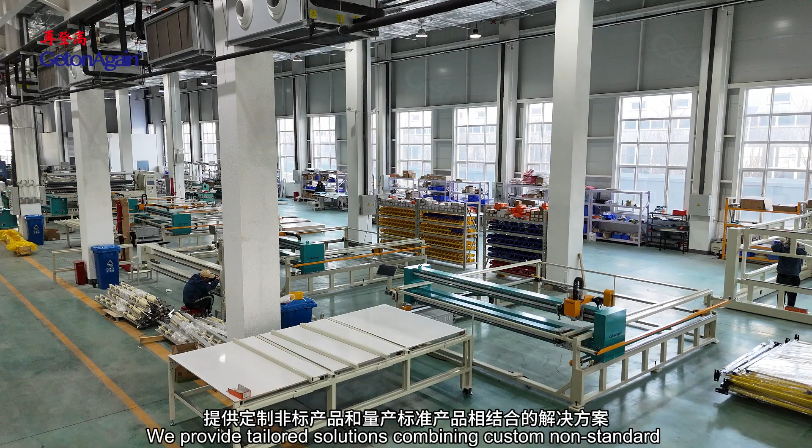We provide tailored solutions combining custom non-standard products with mass-produced standard products, including mechatronic machines, automated production lines, and intelligent factory solutions. Pattern room equipment includes the magnetic inkjet plotter: 2-cartridge model with maximum printing speed of 110 square meters per hour, and 4-cartridge model with maximum printing speed of 200 square meters per hour.

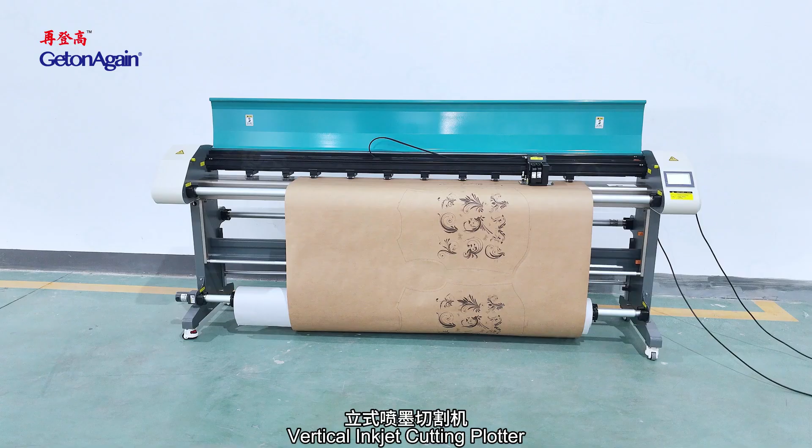Vertical inkjet cutting plotter: one machine, multiple functions, pattern drawing with cutting, or standalone drawing. High-quality rotary cutting knife can cut minimum 80 grams per square meter paper for sample design, saving costs.

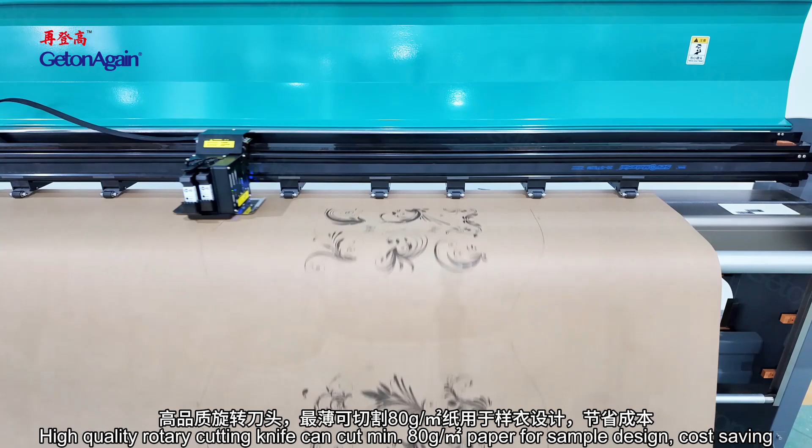Flatbed inkjet cutting plotter, full speed drawing printing and cutting function, suitable for personalization, configured with long knife or short knife, and optional fixed knife sleeve or elastic knife sleeve, suitable for cutting various materials.

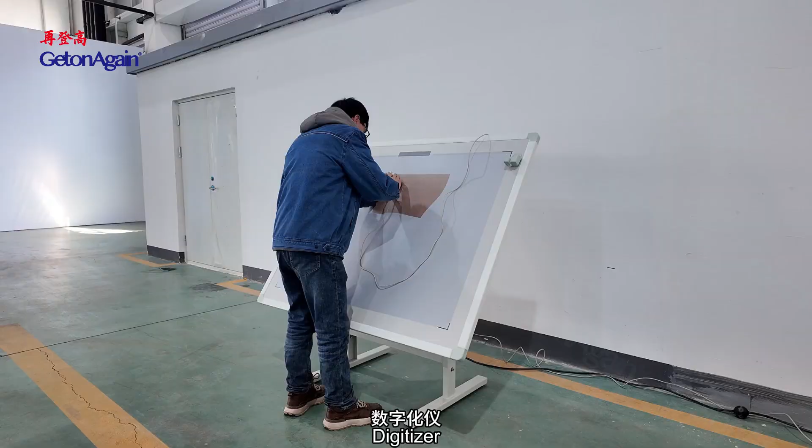Digitizer: easily reading paper patterns, convenient positioning, simple operation, accurately reading patterns, enabling speed up of the design. It is a powerful tool for traditional manual drawing digitization.

Digitizer can be used in various fields, such as clothing industry, fashion design, surveying and mapping, mining, stamping, and environmental protection, etc. Flatbed scanning digitizer.

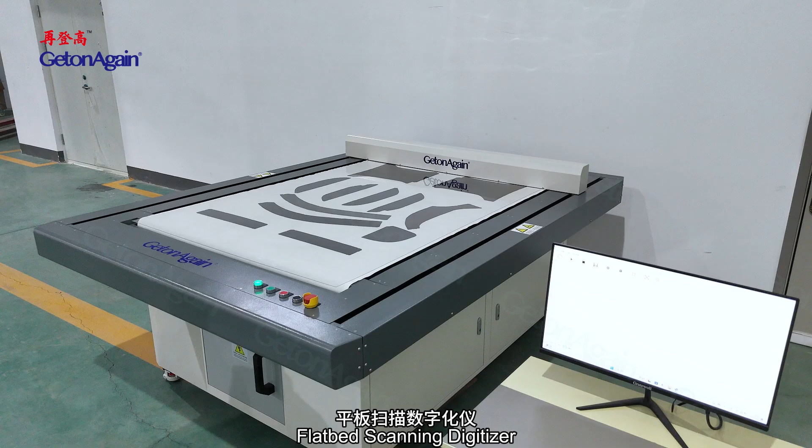One button to start after placing scanning pieces. Can vacuum absorb, auto scan, and auto transmit. According to different models, supports ultra-long width scanning. Scanning speed up to 7,200 mm per minute. Scanning resolution 150 to 300 dpi. High definition panoramic 1:1 image ensures effective identification of various contours, notches, and inner holes.

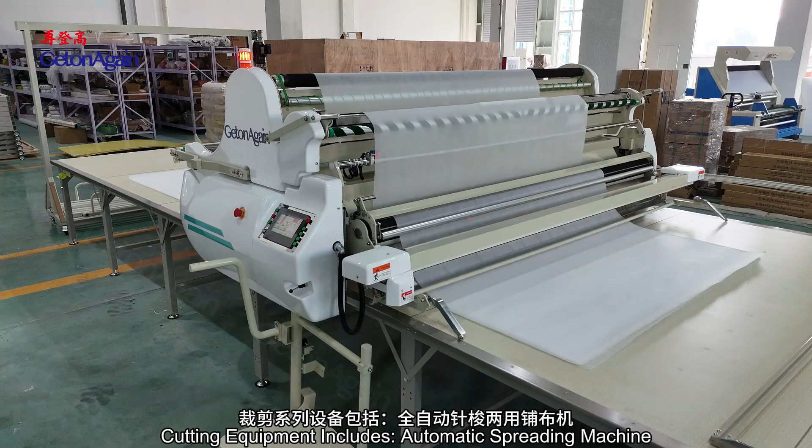Cutting equipment includes automatic spreading machine. Easily set the spreading method, length, speed, quantity, and sections, with intuitive and simple operation. Dual use for both knit and woven fabrics, suitable for t-shirts, children's clothing, loungewear, and toy textiles.

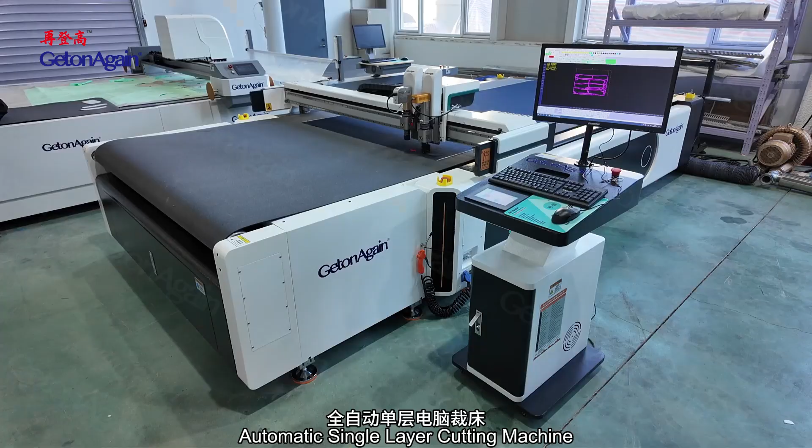Automatic single layer cutting machine. No need to create specialized cutting molds. Cutting can be performed precisely by directly importing CAD design drawings into the equipment. Optimizes cutting paths, integrates repeated cutting lines, allows for pre-simulation of the cutting process, and supports continuous cutting for extra long materials.

Stripe and plaid matching cutting machine, equipped with a few HD industrial cameras, according to the captured size to perform intelligent combination, ensuring high accuracy fabric image capturing.

Stripe and plaid matching auto cutter, equipped with double knives and pen draw punching working mode, specially designed for various stripe and plaid fabric cutting in single ply.

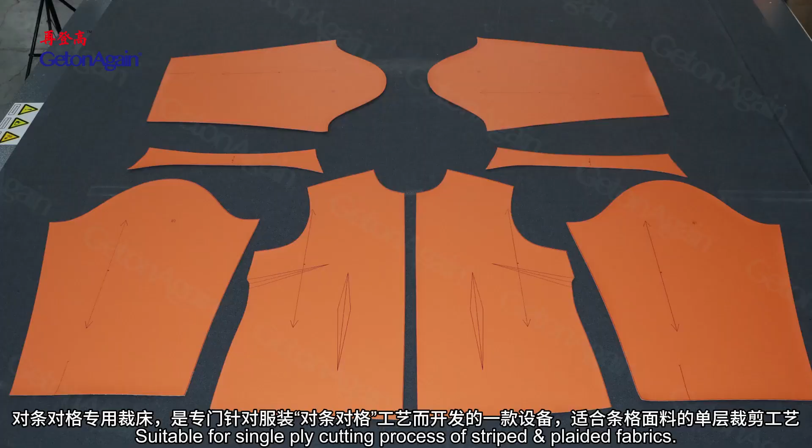High-end clothing customization: the effect of the alignment matching stripe and plaid process has become an important measurement of the quality of this type of clothing. The stripe and plaid auto cutter is equipment specially developed for this process to meet matching stripe and plaid clothing needs, suitable for single ply cutting. Process of striped & plaided fabrics.

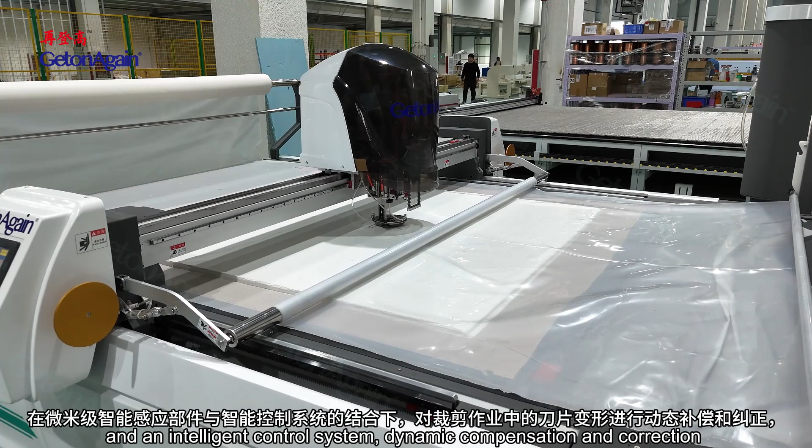Automatic multi-layer cutting machine: through the combination of micron-level intelligent sensing components and an intelligent control system, dynamic compensation and correction of cutter deformation during cutting operations are achieved, significantly reducing errors between the top and bottom layers of fabric during cutting, enabling truly high-precision intelligent cutting.

Embroidery equipment includes the Cloud Smart Teaching Embroidery Machine, suitable for integrated theoretical and practical teaching of computer embroidery in fields such as fashion and apparel design, clothing design, and engineering.

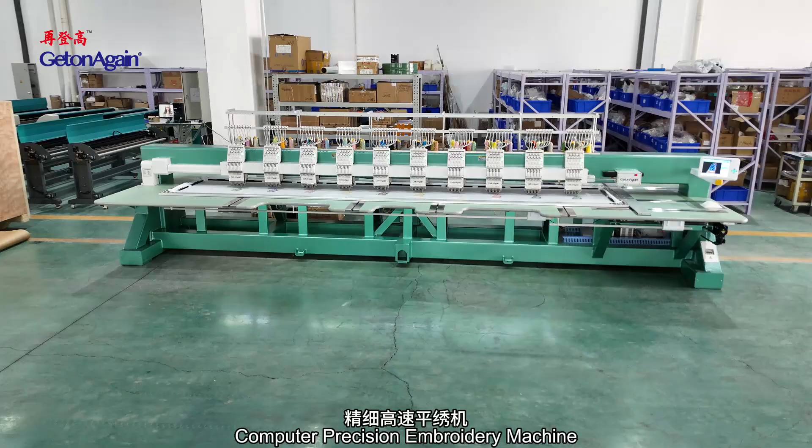Computer Precision Embroidery Machine features a high-speed sewing head with extremely low failure rates, long service life, low noise, and stable, reliable quality, suitable for embroidering small letters, premium garments, high-end home textiles, footwear, hats, automotive products with embroidery, etc.

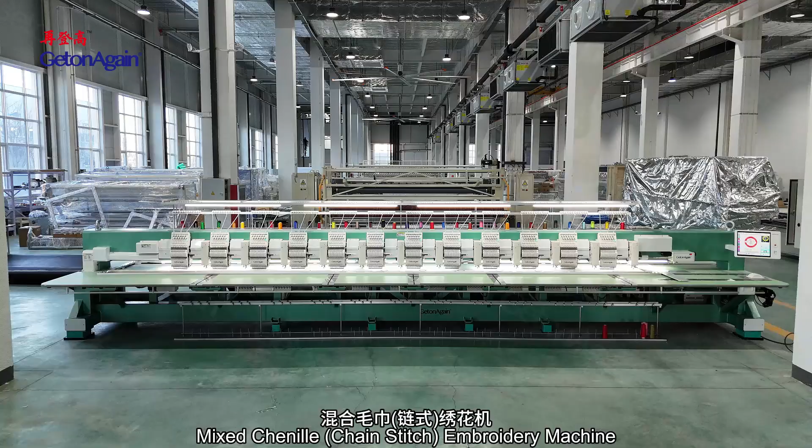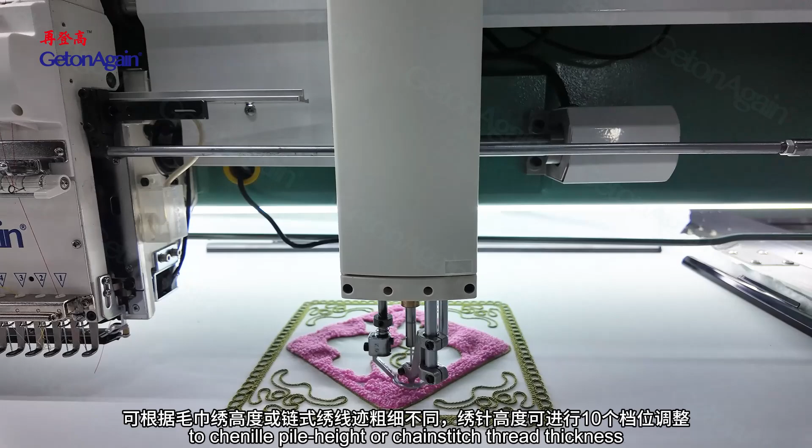Mixed Chenille Chain Stitch Embroidery Machine. Mixed embroidery feature, according to color sequence settings, switchable between chenille embroidery and flat embroidery, simplified operation. Chenille needle height can be adjusted for 10 levels according to chenille pile height or chain stitch thread thickness.

Multifunctional embroidery on garments, shoes, caps, home textile, toys, bags and luggage, art craft, etc. Multi-head tubular embroidery machine, multi-head series, suitable for embroidering on flat items, caps, garments, shoes, belts, bags, etc.

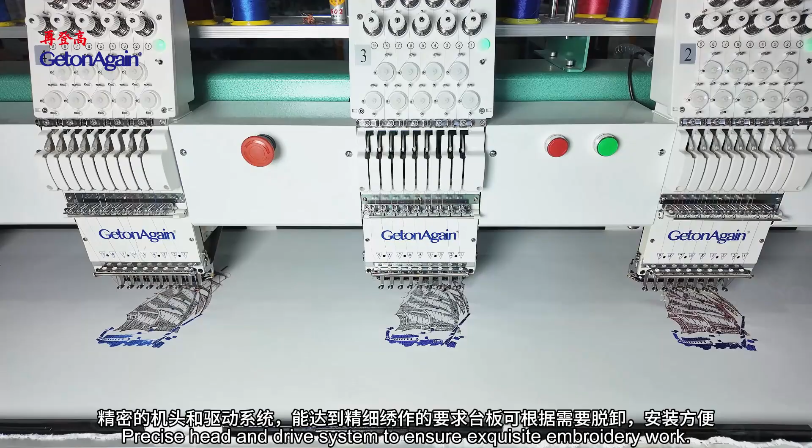Auto thread feeders, auto color change, auto thread break detection, 270-degree wide angle cap system, red light locating, LED lighting, precise head and drive system to ensure exquisite embroidery work. Drop tables, easy to lift up and down. Multiple heads greatly improve work efficiency, suitable for embroidery shops and factories of a certain scale.

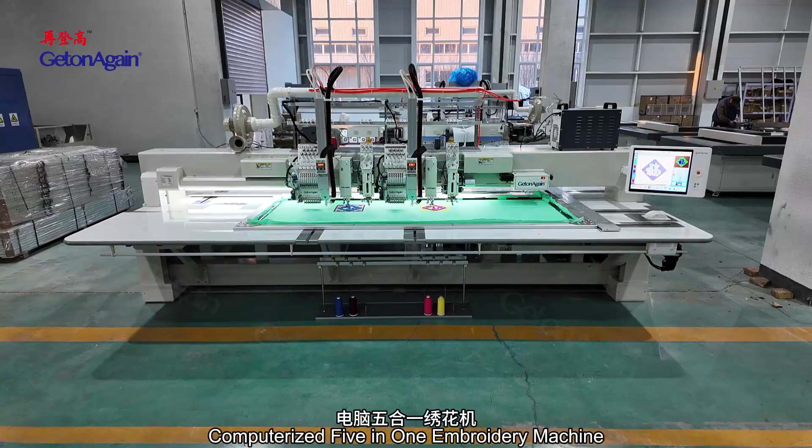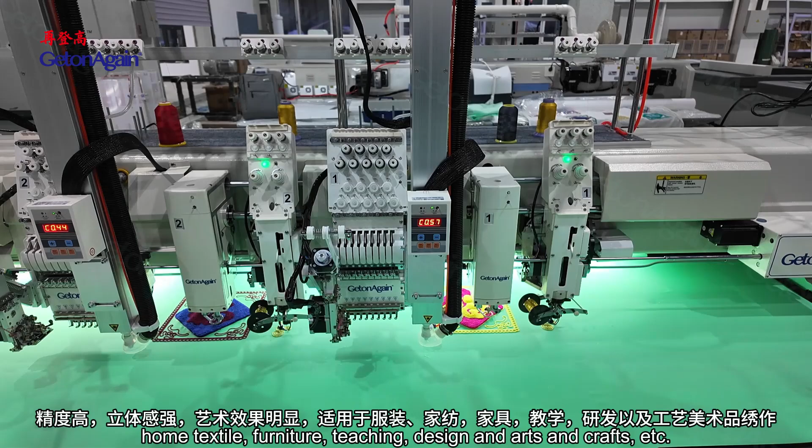Computerized 5-in-1 embroidery machine, integrating five functions in one machine: flat embroidery, quilting, tape cording embroidery, chenille, and chain stitch embroidery, plus double sequin device and laser cutting function. High precision with strong stereo sense and ideal artistic effect, suitable for embroidery of apparel, home textile, furniture, teaching, design, and arts and crafts.

Tufting series equipment includes computerized tufting machines with a rotary tufting head at any angle, avoiding positive-negative stitching difference, for higher efficiency and better tufting results. Suitable for various rugs, carpets, hanging carpets, tapestry, and other flooring decorative and home furnishing products.

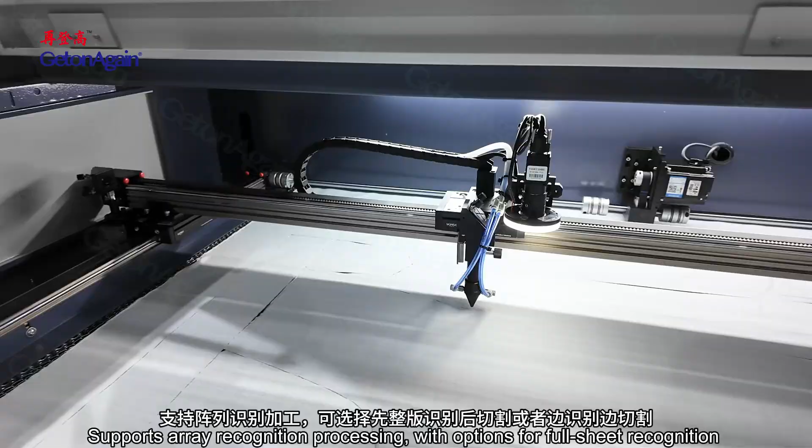Laser equipment includes small format camera positioning laser engraver cutting machines, supporting array recognition processing with options for full sheet recognition followed by cutting, or simultaneous recognition and cutting. Features multi-template mixed cutting, allowing recognition and positioning of different patterns to be completed in a single operation.

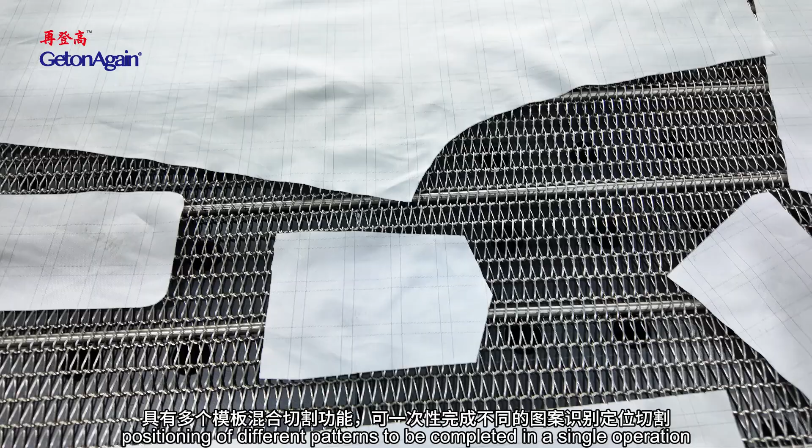Pre-sewing auxiliary equipment includes automatic edge alignment and relaxing machines with air blowing, rolling fabric mounted and folded into a flat fold state to achieve tension-free fabric placement. A wave-type air blowing device relaxes the fabric during the loosening process.

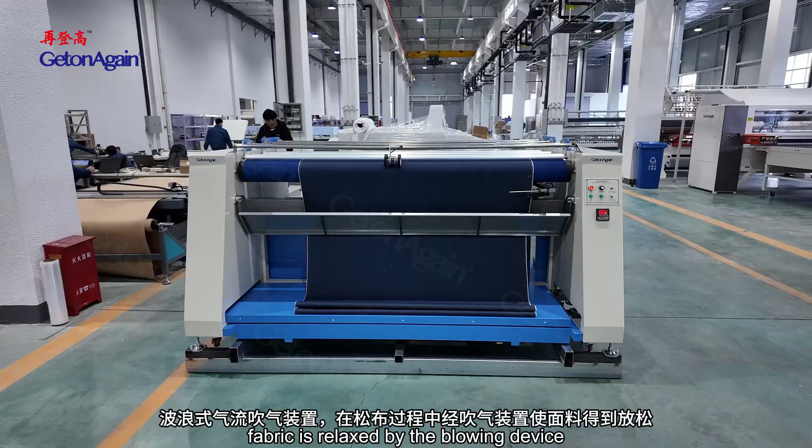Automatic marking machine with one-click start and intelligent grabbing—one person can operate 4 to 5 machines at the same time, reducing labor costs. Features automatic number adjustment, automatic counting, wrinkleless flipping, continuous numbering, and accurate, clear positioning. Used for cutting pieces for jeans, shirts, workwear, and down jackets.

Fully automatic winding machines. Sewing equipment includes an automatic mattress protector skirting sewing machine with interlock and overlock functions, suitable for processing fitted sheets—all-in-one to finish binding and stitching of elastic rope cord and bed skirt, plus overlocking of the bed skirt to the mattress protector topper layer.

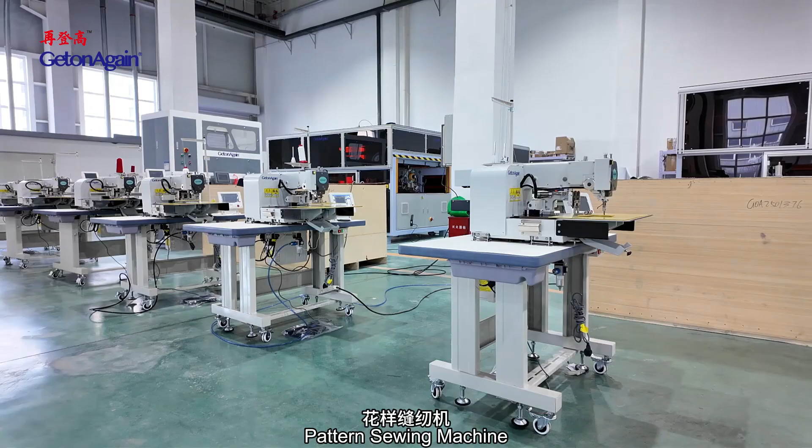Pattern sewing machine. This machine can easily sew 1200 thick thread with a thickness of 12mm, featuring a 2-times large rotary hook, automatic thread trimming, and a maximum sewing speed of up to 2500 rpm.

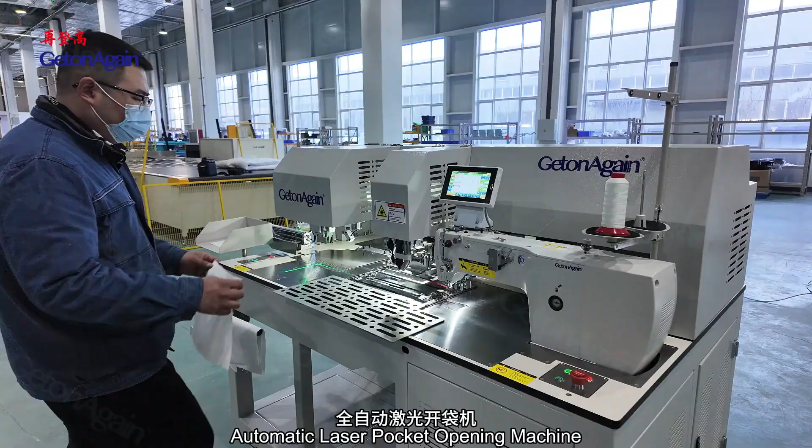Automatic laser pocket opening machine with automatic ironing, free pocket folding, automatic material feeding, laser pocket opening, automatic sewing, automatic thread trimming, and automatic material collection. Used for front and back pockets of men's and women's clothing, suits, inner and outer pockets of jackets, dress pants, hoodies, sun protection clothing, school uniforms, sportswear, cotton padded jackets, down jackets, workwear, uniforms, trench coats, and cashmere coats.

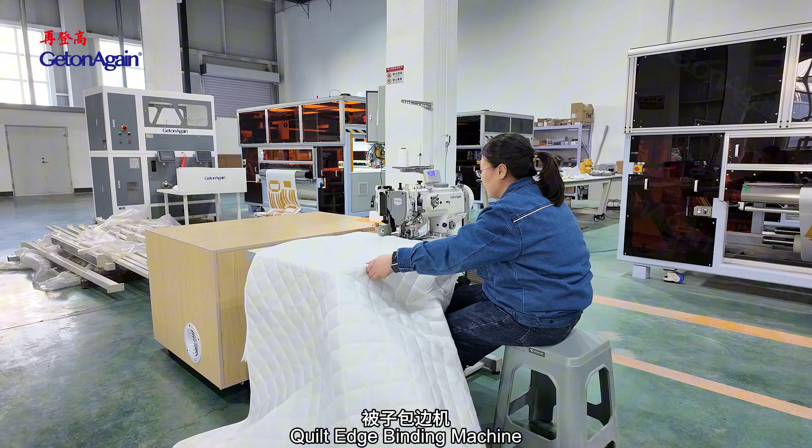Quilt edge binding machine features single needle compound feed, achieving cutting, binding, and sewing in one seamless operation. An enlarged right side waste discharge port with pneumatic waste discharge assistance ensures smoother disposal of waste generated during edge cutting. A special synchronized feeding structure, including alternating presser foot, needle, feed dog, and binding attachment, ensures no wrinkles or misalignment during straight line or corner sewing for a flawless binding effect.

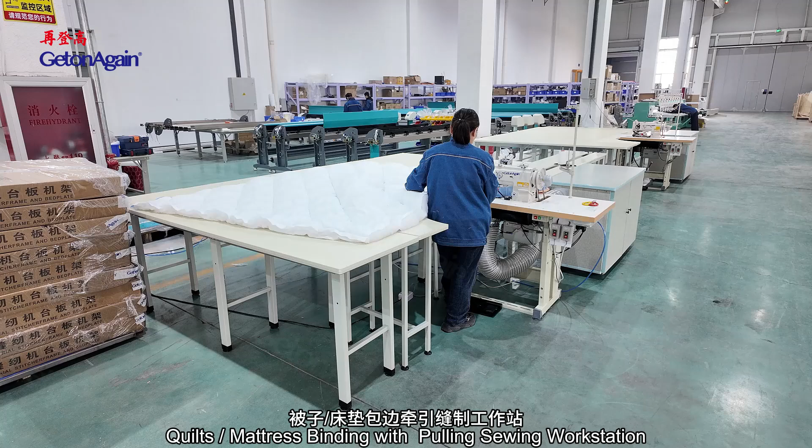Designed for edge binding processes of quilts such as cotton quilts, summer quilts, spring and autumn quilts, and other bedding items. Quilt and mattress binding with pulling sewing workstation.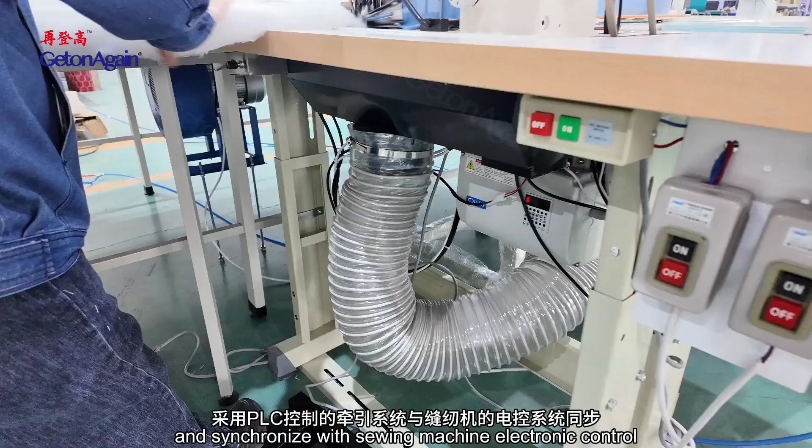Equipment factory standard provides an air floating table and automatic pulling device, making sewing worker operation easier and smoother. Equipped with a PLC control pulling device synchronized with sewing machine electronic control, these two machines work at the same speed and synchronize direction.

Optional automatic storage and vacuuming device improves efficiency, reduces dust emissions, and provides the sewing operator a clean and tidy working environment. Binding results are rich with a strong, solid feel—corners are smooth and nice, evenly stitched lengths, no hairy edge, no edge folding, and no corner raising effects.

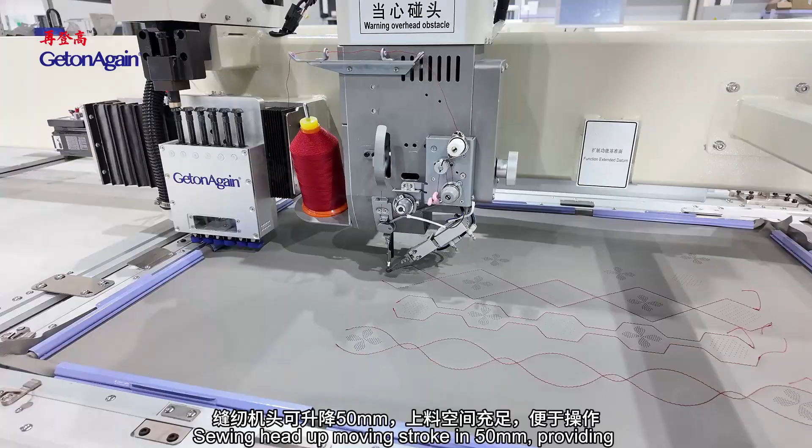Fully automatic perforation and sewing integrated machine. The punching machine head is specifically designed and developed for leather materials, equipped with various round punching tool specifications. The sewing head's up-moving stroke is 50mm, providing sufficient space for material loading and easy operation. Suitable for perforation and sewing processes of various types and thicknesses of genuine leather and microfiber leather used in car seats, automotive interiors, aircraft seats, luggage, furniture, and more.

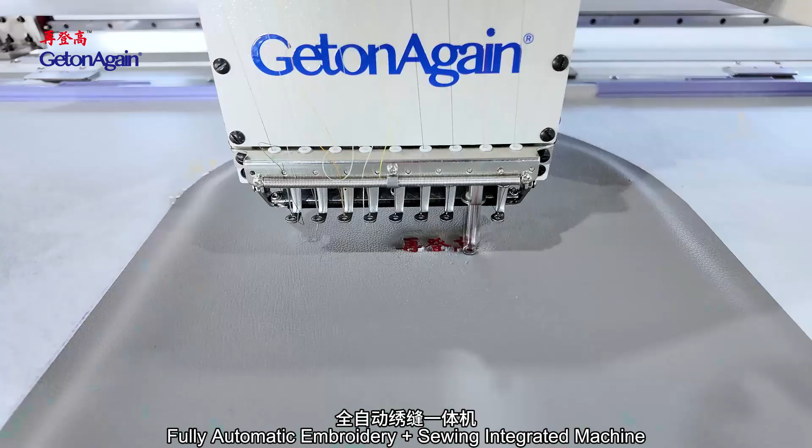Fully automatic embroidery and sewing integrated machine with a 9-color embroidery machine head to meet the embroidery needs of different industries. The embroidery thread clamping mechanism incorporates a novel upper thread clamping assembly, effectively reducing thread breakage and slippage occurrences during operation.

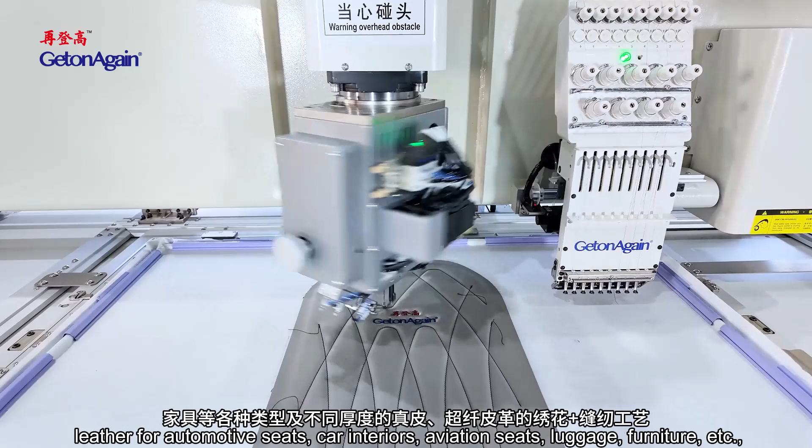Specially designed sewing machine head for leather materials produces beautiful stitching. Presser foot height is motor controlled and highly adjustable. The sewing machine head has an up-down moving stroke of 50mm, providing ample space for material loading and ease of operation. Suitable for various types and thicknesses of genuine leather and microfiber leather for automotive seats, car interiors, aviation seats, luggage, furniture, and more, combining embroidery and sewing processes.

Multi-hole bar tacking machine: press arm and sewing frame work synchronously to ensure high precision bar tacking. Suitable for chair head, cushion and pillow, all those with fillings, and bar tacking requirement for reinforcing sewing work.

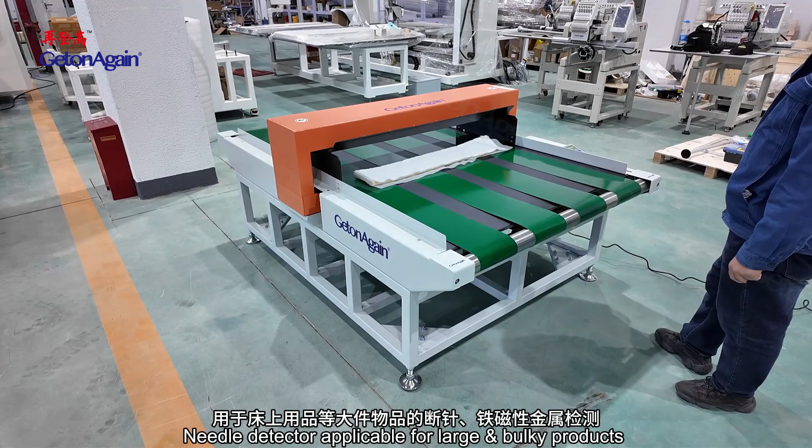Industrial sewing machines include various overlock and lock stitch machines. Post-finishing equipment includes needle detector, applicable for large bulky products with ferromagnetic metal detection, for example bedding, etc. Working width can be adjusted between 1,200 to 4,000 mm according to customer setting.

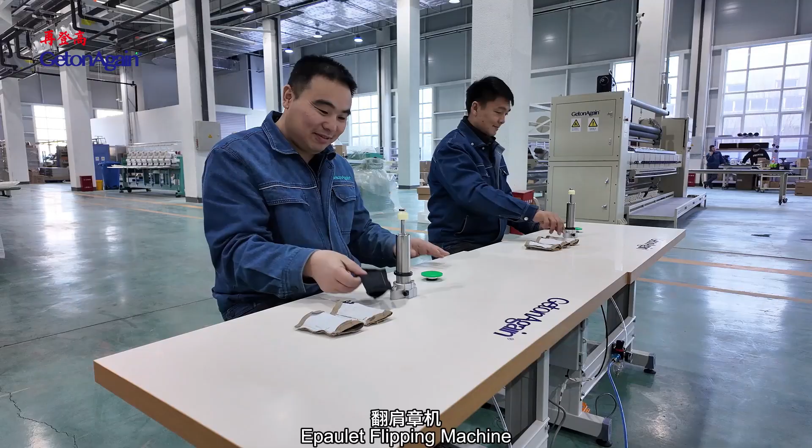Epaulet flipping machine replaces manual operation with high efficiency, safety and reliability, suitable for the flipping and turning process of epaulets or straps of various sizes and other products.

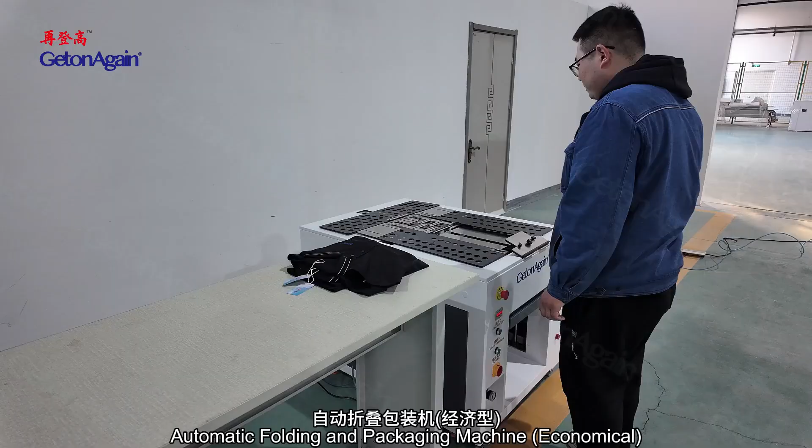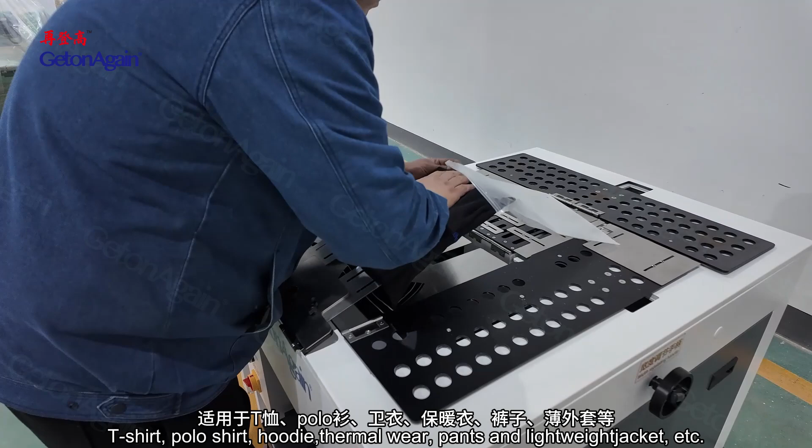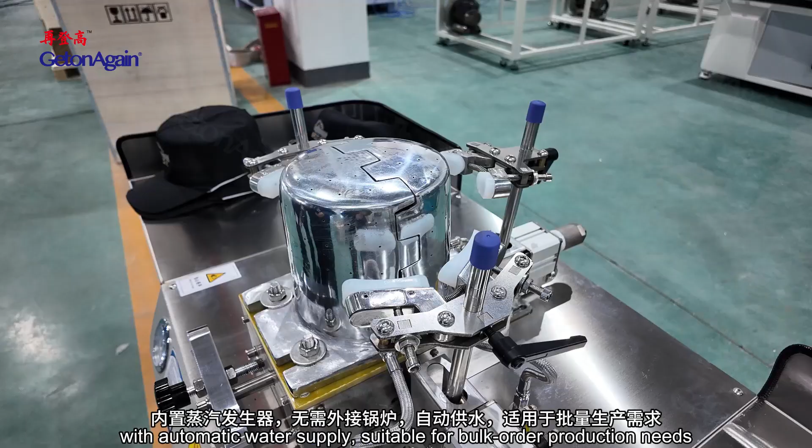Using a robotic arm, the machine can automatically grip the cap. Simply place the cap on the mold to complete the pressing process.

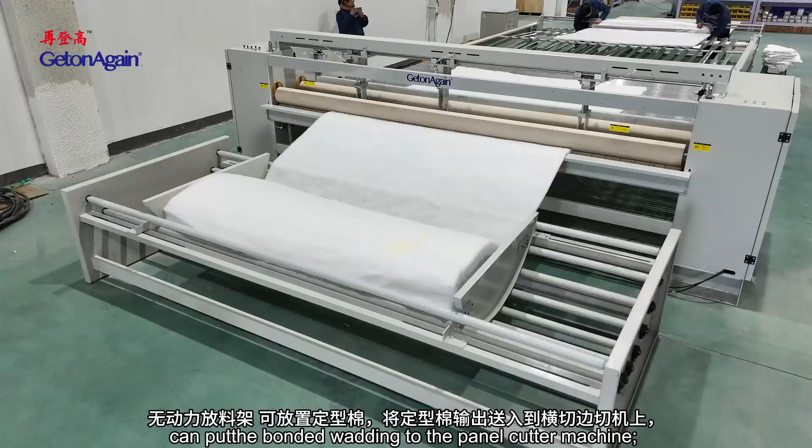Electric flying knife automatic cross cutting. Two sets of longitudinal hard cutting blades can be increased or decreased according to product track requirements. Automatically feeding the wadding fibers into the comforter envelope case after cutting off. Length set is controlled by computer and could be set to any value according to requirement.

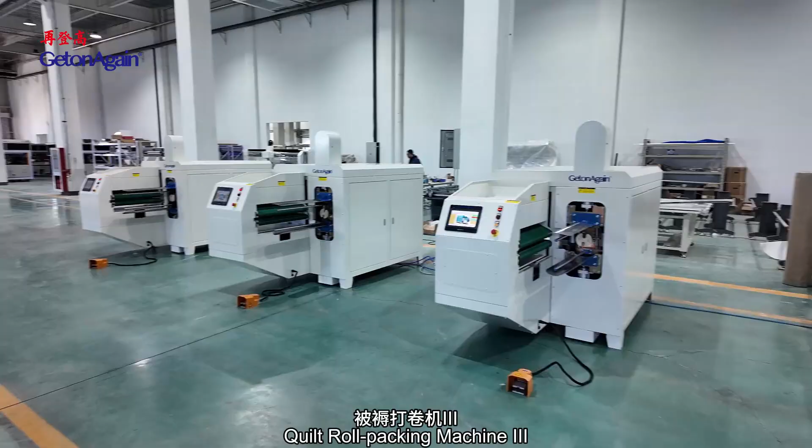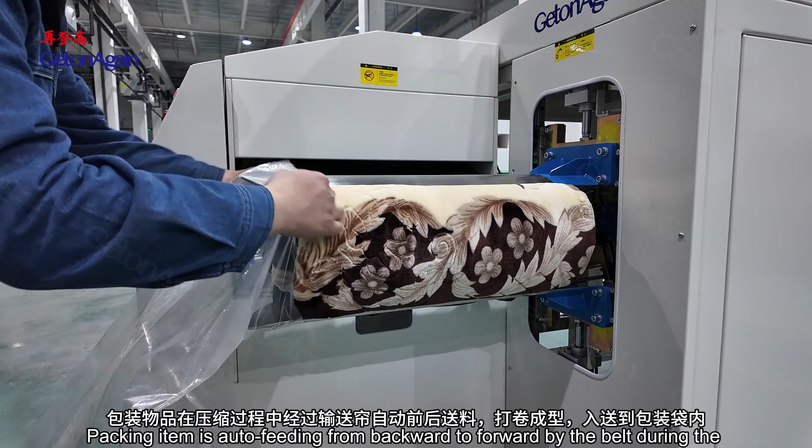Quilt roll packing machine, suitable for rolling and packing of fluffy items such as quilts, pillows, cushions, etc., to reduce the volume and storage, as well as lower transportation cost. The packing item is auto-fed from backward to forward by the belt during the compressing process and rolled to pack into the bag.

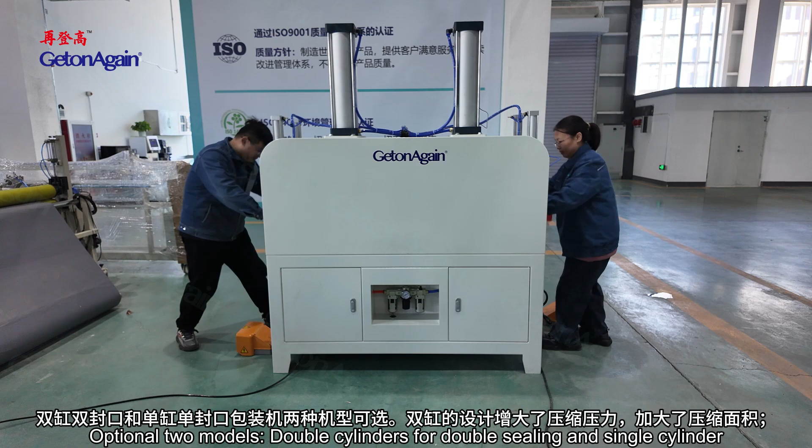Double cylinders, double operation, optional models. Double cylinders for double sealing and single cylinder for single sealing. The double cylinder design increases the compression pressure and area. Double seal design: two workers operate two products at both sides of the machine, greatly improving work efficiency, suitable for compressed packing of pillows, cushions, bedding, plush toys and other products.

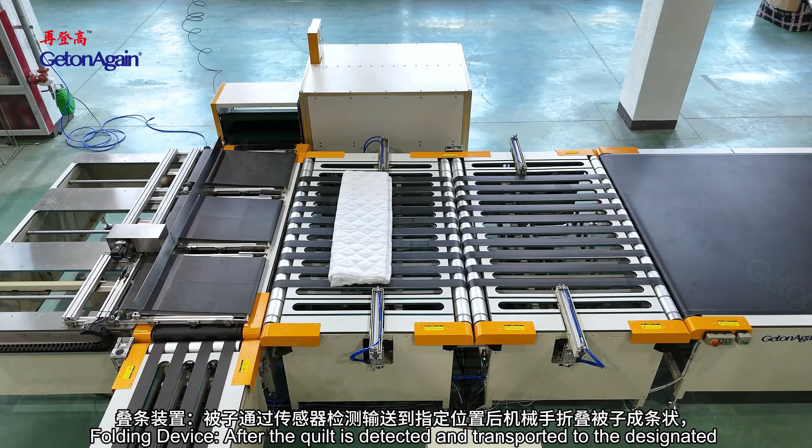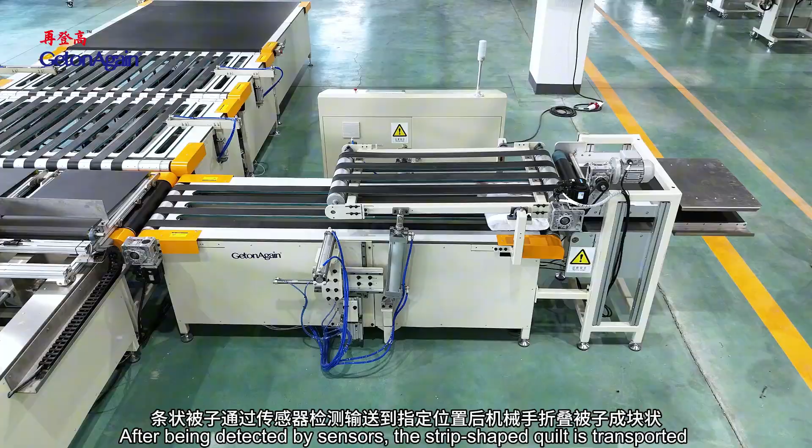Automatic folding and packaging machine: equipment mainly composed of folding device, rolling device, stacking and compress plus conveyor device. Folding device: after the quilt is detected and transported to the designated position by sensors, a robotic arm folds the quilt into a strip shape. After being detected by sensors, the strip-shaped quilt is transported to the designated position and folded into a block shape by a robotic arm. Rolling device: the strip-shaped quilt is transported to the automatic rolling device to complete the rolling process.

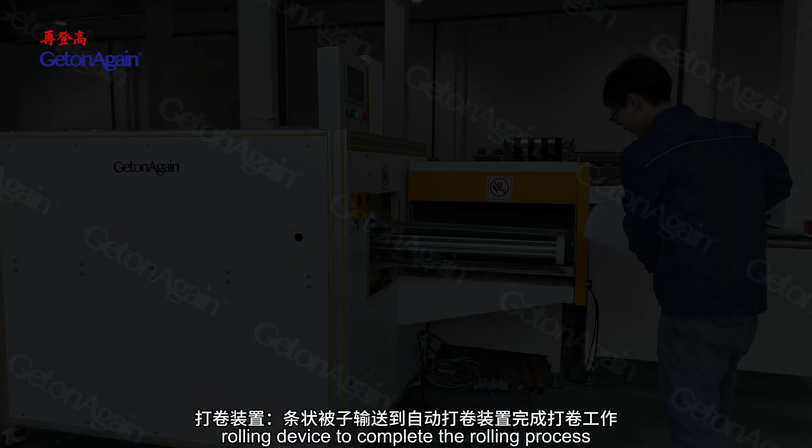Quilting equipment includes computerized multi-head rotary hook quilting machine model N, double row lock stitch multi-head quilter with large rotary hook. Max speed of 1,500 RPM, more than 2 to 3 times that of normal shuttle quilting machines, greatly improving work efficiency. 3-fold capacity rotary hook, less bobbin changing frequency, beautiful stitches, no lost stitch, no thread loose.

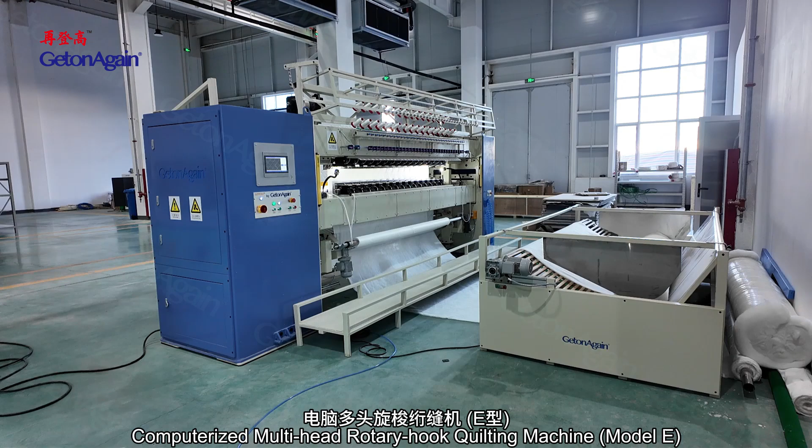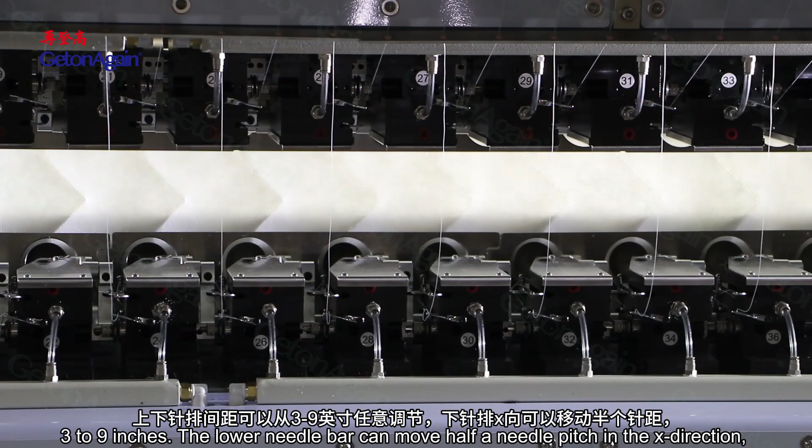Computerized multi-head rotary hook quilting machine model E: 5-time jumbo rotary hook, less bobbin changing frequency, beautiful stitches, no lost stitch, no thread loose. The interval between the upper and lower needle bars can be adjusted to any value from 3 to 9 inches. The lower needle bar can move half a needle pitch in the X direction, so that quilting needle bars of different sizes and patterns can be combined, especially for some non-standard size patterns, which can achieve a unique effect.

Computerized multi-needle shuttle quilting machine, flying shuttle, for quilting of fitted sheets, bed covers, summer quilts, and clothing products with quilting pattern.

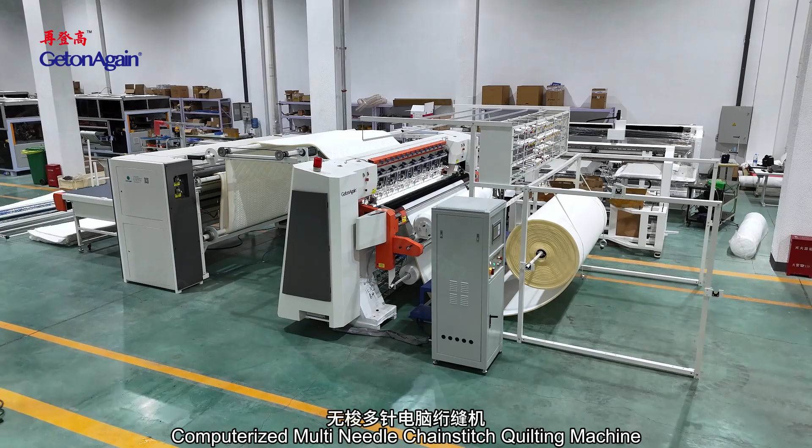Computerized multi-needle chain stitch quilting machine: servo motor-driven rollers and lead screws ensure precise quilting patterns, suitable for mattresses, mattress covers, sofas, bedding, home textiles, and home decor. Computerized single-needle quilting machine with lifting head.

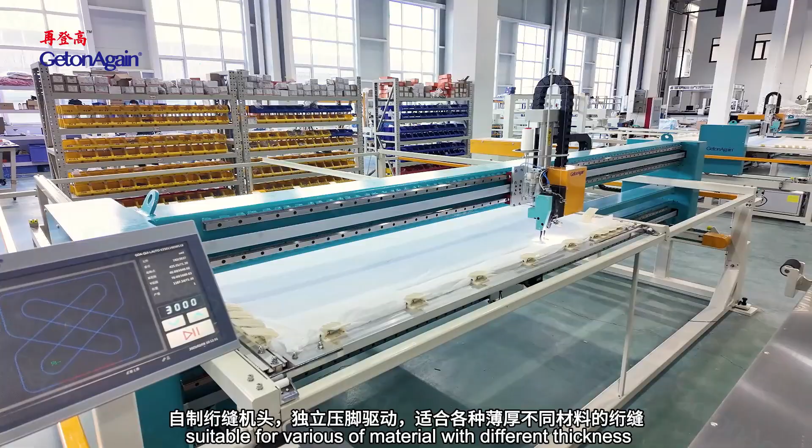The extendable quilting frame can be freely adjusted according to required size. GetonAgain quilting head features independent presser foot drive, suitable for various materials with different thickness. Full servo motor control provides powerful and accurate driving force. Automatic lifting head easily changes the frame after finishing quilting.

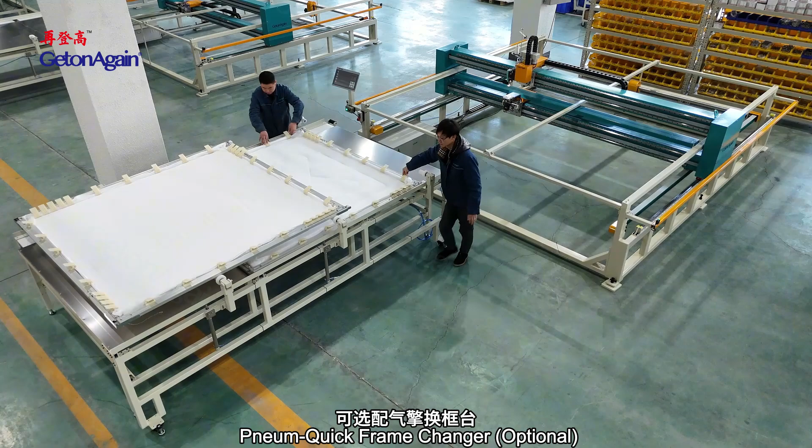Pneum-Quick frame changer optional, for quilting process of home textile products such as quilts, comforters, mattress protectors, blankets, sleeping bags, single needle art quilts, etc.

Ultrasonic equipment includes the ultrasonic slitting machine, which adopts ultrasonic cutting technology to ensure smooth cutting edges, precision edge cutting, and no deformation, without fraying, fiber pull, or edge curling after cutting. Cutting rollers and patterns can be customized to meet various needs.

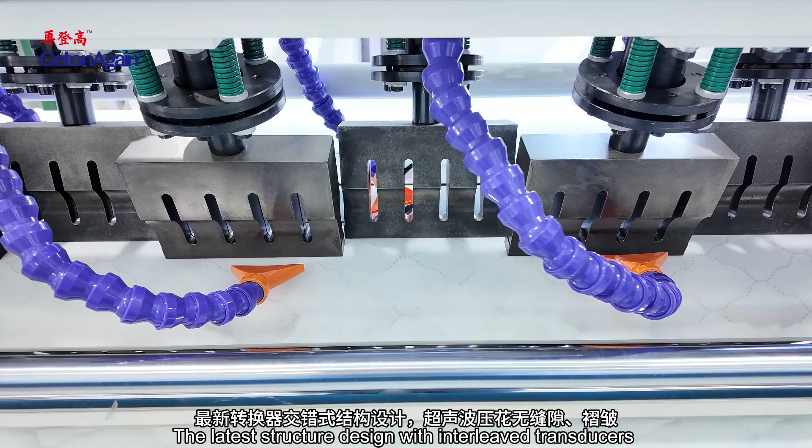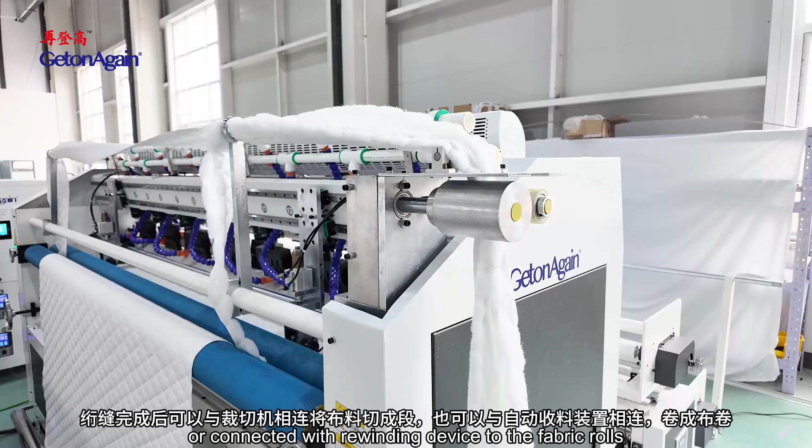The automatic ultrasonic quilting machine integrates ultrasonic sewing and ultrasonic edge sealing and cutting automation into one, completing the process in a single step. The latest structure design with interleaved transducers ensures seamless, non-wrinkled embossing. After quilting, it can be connected with a cutting machine to finish the product, or with a rewinding device for fabric rolls. The ultrasonic quilting machine bonds multi-layer polyester fabric, non-woven fabric, polyester wadding, or artificial leather, etc., embossing different patterns on it. Patterns are clear and beautiful, the fabric doesn't deform, and bonding is strong with high efficiency.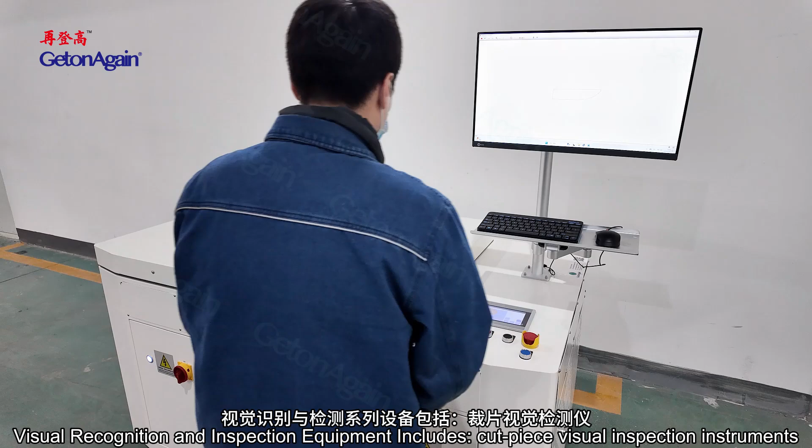Visual recognition and inspection equipment includes cut piece visual inspection instruments. After manual placement, one-click start allows for automatic scanning, automatic inspection of cut pieces, and automatic data storage. Scanning speed can reach up to 120 millimeters per second, with no need for additional lighting, ensuring reliable use in all weather conditions. Scanning resolution is 150 to 300 dpi, and the high-definition panoramic 1:1 image ensures the inner and outer contours of the cut pieces are clearly visible.

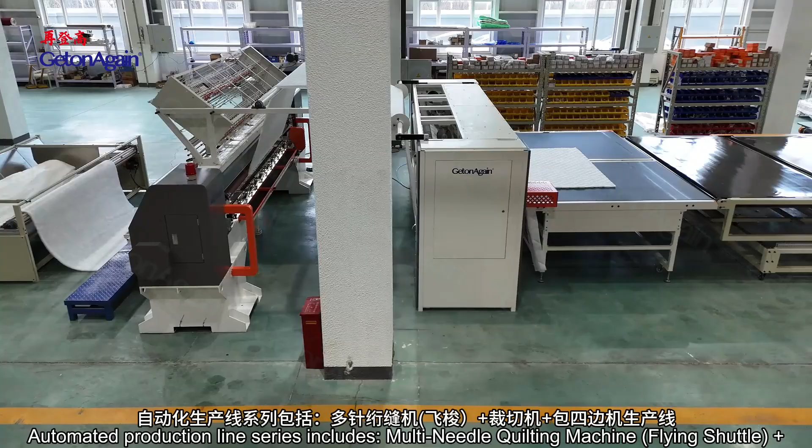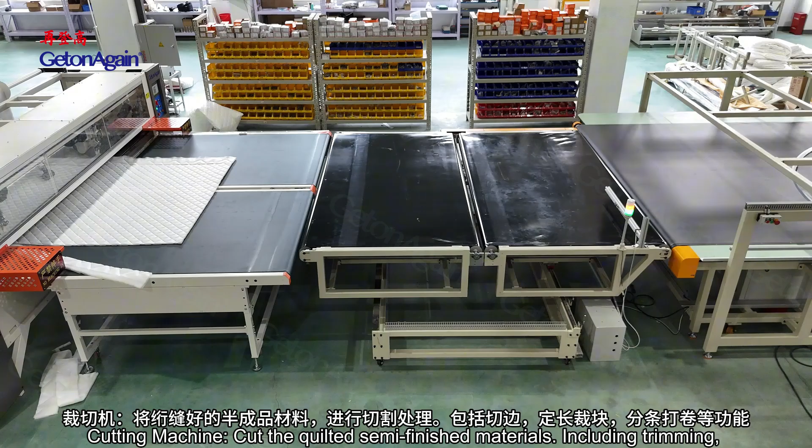The automated production line series includes the multi-needle quilting machine, flying shuttle and cutting machine, and 4-side tip binding machine production line. The multi-needle quilting machine quilts and fixes lock stitches on raw materials, mainly used to process quilt cores and cushions. The cutting machine cuts the quilted semi-finished materials, including trimming, fixed length cutting, slitting, and rolling, among other functions.

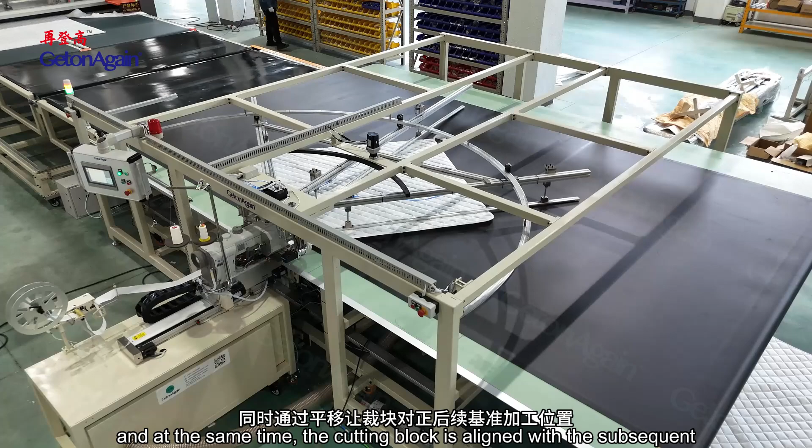Alignment platform: a material transfer alignment mechanism. The cutting block waits to enter the next sequence on this platform, and at the same time, it is aligned with the subsequent reference processing position by translation.

Automatic tip binding machine: the cutting piece is processed by the tip binding machine to make the edge of the cut piece beautiful, using a machine rounded corner tip binding process. Cutting and tip binding are integrated, with all actions completed automatically.

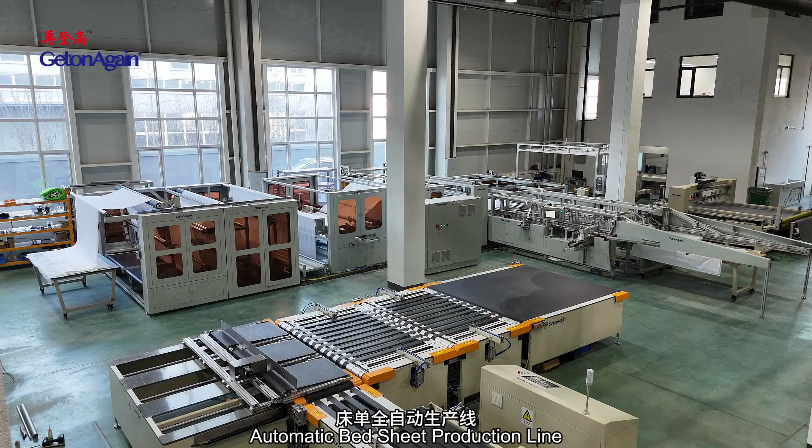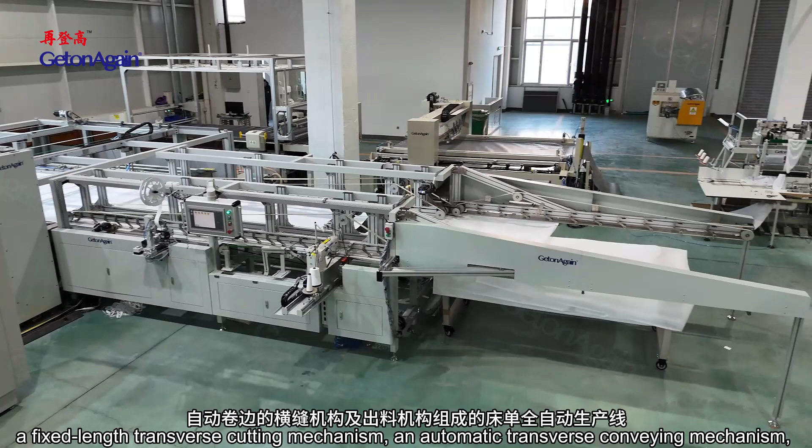Automatic bed sheet production line: a fully automated bed sheet production line composed of a feeding mechanism, an adjustable width longitudinal sewing mechanism, a fixed length transverse cutting mechanism, an automatic transverse conveying mechanism, an automatic hemming transverse seam mechanism, and a discharging mechanism.

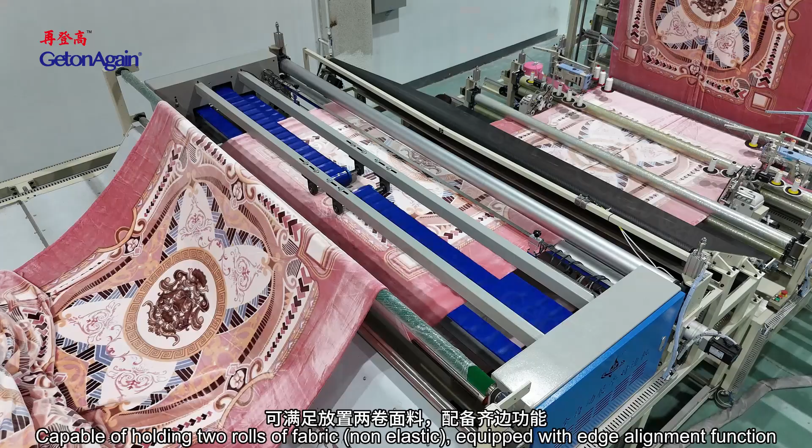The automatic blanket straight corner binding machine is capable of holding 2 rolls of non-elastic fabric, equipped with an edge alignment function, automatically pulling and cutting into panels. Pulling lengths can be set freely. This covers the 4-side tip binding sewing process for inelastic blankets.

Home textile comb cotton production line.

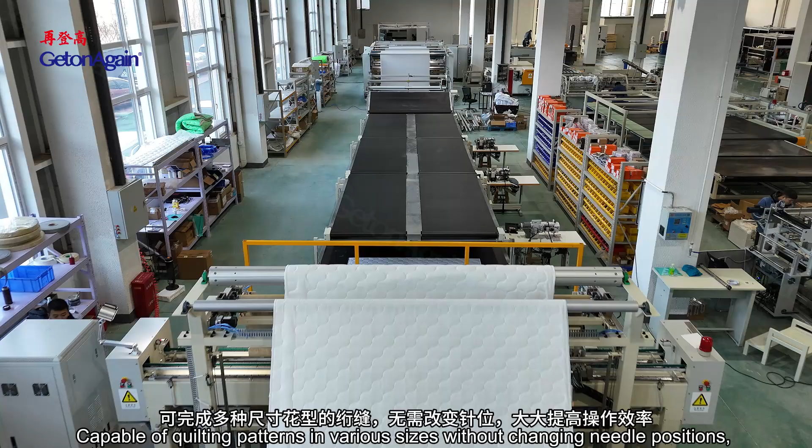The computerized multi-head rotary hook quilting machine and 4-side edge sewing machine is capable of quilting patterns in various sizes without changing needle positions, greatly enhancing operational efficiency. The double row machine, with its lower needle row able to move half the head distance in the X direction, creates combination patterns of different sizes when coordinated with the upper needles.

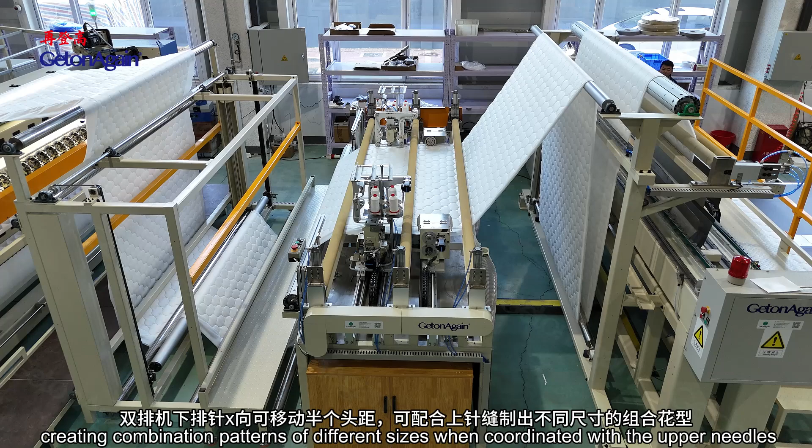Longitudinal sewing uses double chain stitch, with optional lock stitch or overlock stitch; transversal sewing uses multi-needle chain stitch. Transversal cutting occurs between the 4 stitches, cutting to set length and feeding to the next sequence.

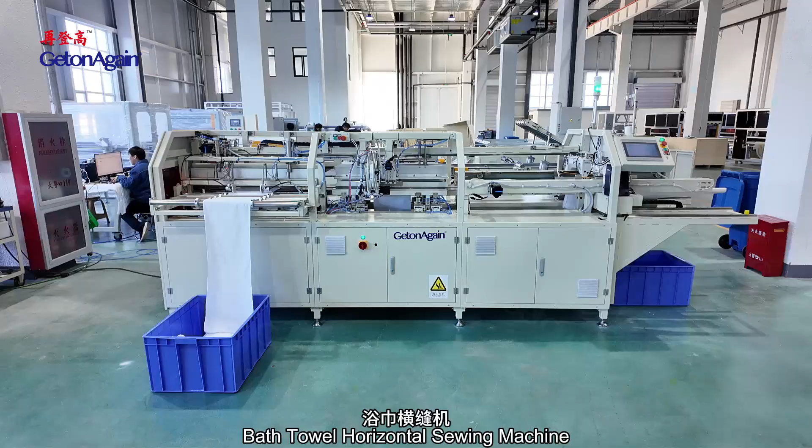Bath towel horizontal sewing machine: a folding and sewing process for inelastic towels.

Garment CAD includes Garment CAD, SuperNesting, Template CAD, Intelligent Tufting CAD, Wire Stitching CAD, and Perforation and Embroidery CAD.

In addition, GetonAgain has developed a digital operation and management system for industries such as garment processing and machinery manufacturing. This system helps customers improve production efficiency and management levels. It is a specialized multi-direction, full process, and full chain digital solution. Its features can be summarized as the four ones: one industrial enterprise, one technology platform, one data standard, and one operating system. It is the optimal choice for enterprises to achieve digital transformation and intelligent upgrading.

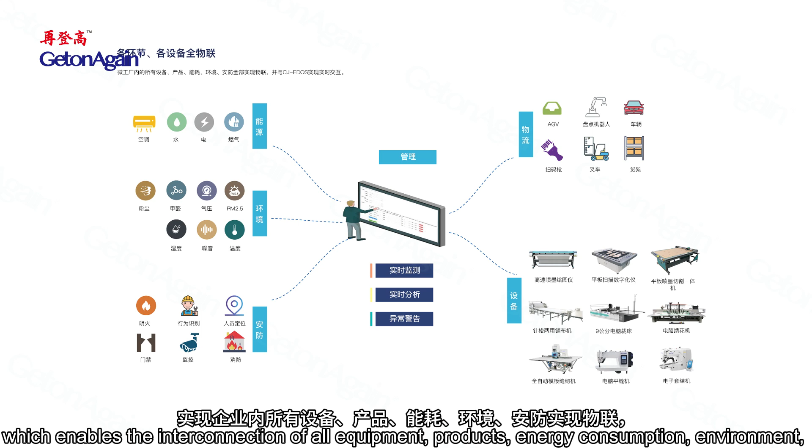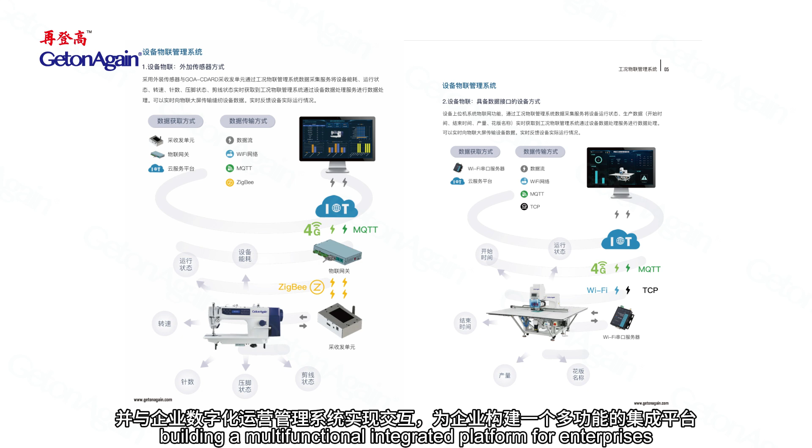Furthermore, by integrating Internet and IoT technologies, the company has developed an enterprise operating condition IoT management system, which enables the interconnection of all equipment, products, energy consumption, environment, and security within the enterprise. This system interacts seamlessly with the enterprise digital operation and management system, building a multifunctional integrated platform for enterprises. It enables functions such as data collection, real-time monitoring, data analysis, and remote management.